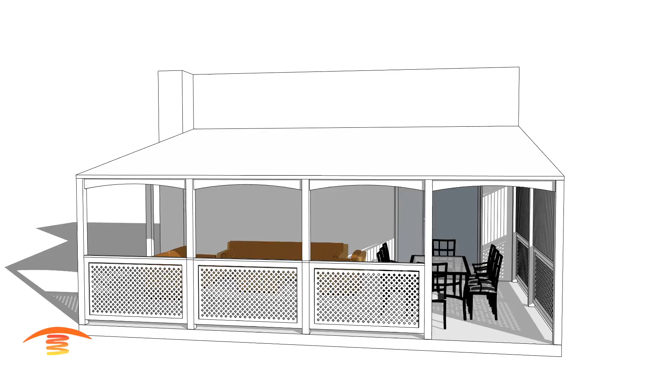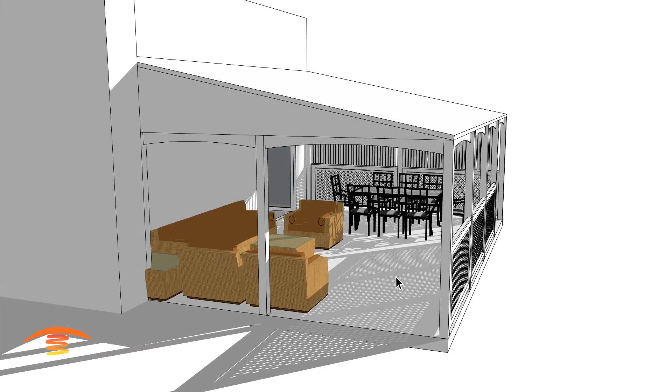Let's take a look at this residential application. So we have a couple of seating areas. We have dining space here, and then we have some reclining space back over here. You can see that the reclining space does not extend out to this area over here, so we're going to concentrate more on that space over here.

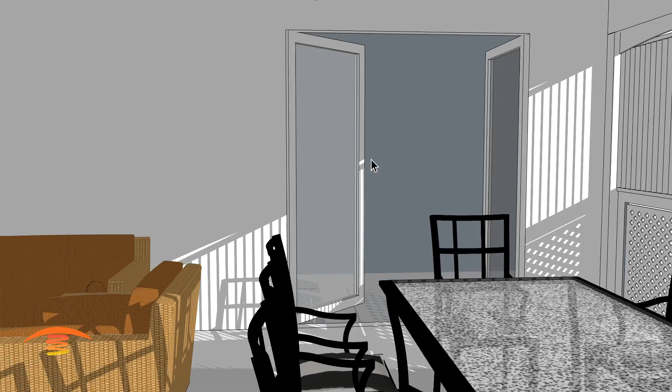Also, we have a solid wall. We have a nice wind wall back here. We've got some lattice that would reduce the amount of wind movement. We have a solid ceiling, and then also we have the doors back here. Now I have these doors so that they're opening inwards. I hope that's true. Turn off that shadow there for a minute.

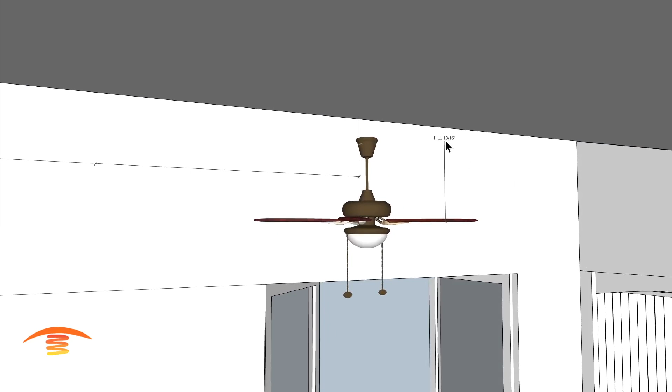Also, we have these fans. Now the fans I have at 36 inches away from the wall, and then I have them 7 feet from each other. And let's go ahead and look at the drop here. I know I have a drop from the ceiling point. Actually, I take that back. I have it measuring off this corner here, so I'm going to just remove that for a minute. But there is a certain amount of distance the customer said they were from the top. I can't get the measurement here right now.

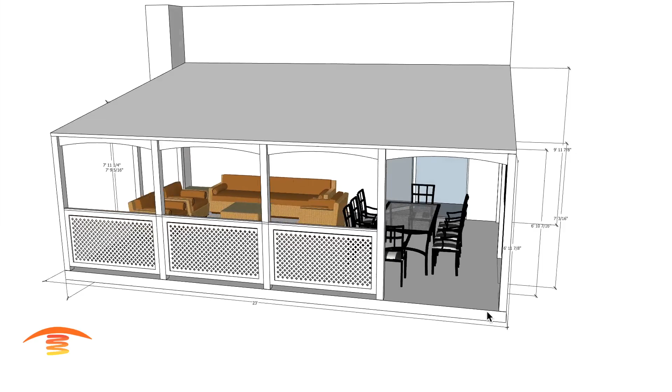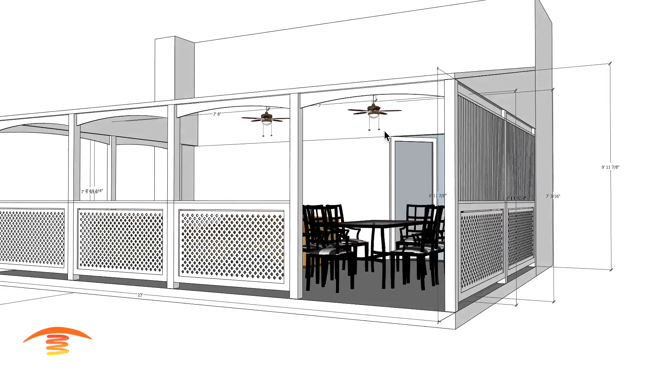In any case, let's look at the overall dimensions. 23 feet wide. I have a 15-foot depth to the back wall to the outside edge. Here I have about 10-foot height, and it comes down to, I believe, 6'11", so almost 7 feet height over here. I think that's about it. So the fans, because they're kind of close to the wall back here, do offer a little bit of a challenge.

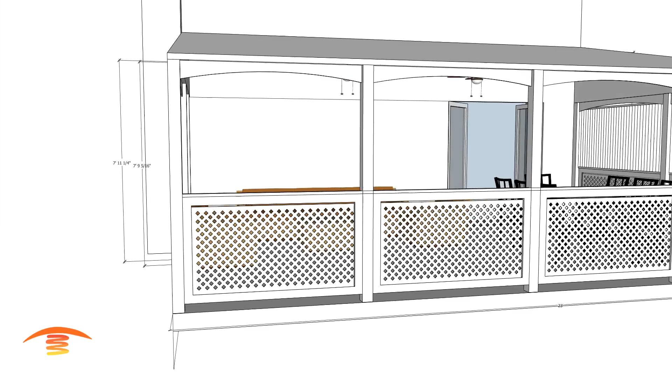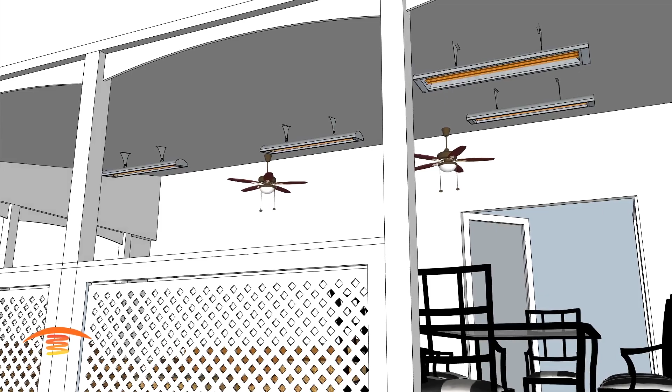So I have two different options for this application. Let me turn off these dimensions here real quick. And this would be option number 1. So in option number 1, I'm utilizing the CD 4024. So these are 4,000 watt 240 volts.

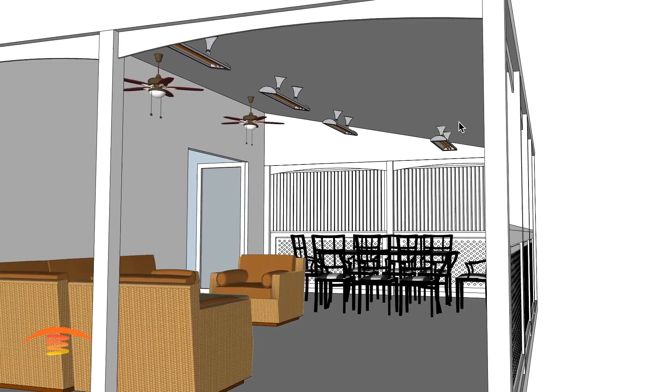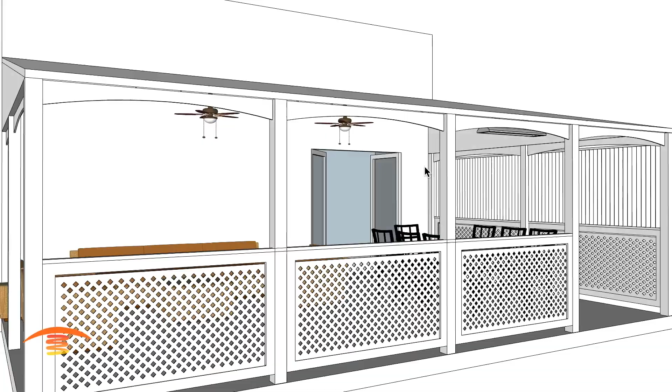One thing I did not mention yet is that this is a very cold climate area. This is in, I believe, Ohio. And so we obviously get some very, very cold weather. So this heating system is not going to produce the right amount of heat at all times of the year. Once you get down into even 40-degree weather, it can be questionable whether it's acceptable for you or not. But definitely when you get below 40-degree weather, 20s, I can't guarantee that would be a comfortable option in all cases. It's an individual thing.

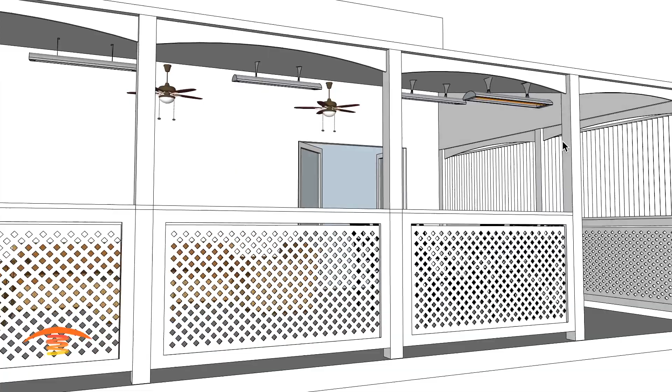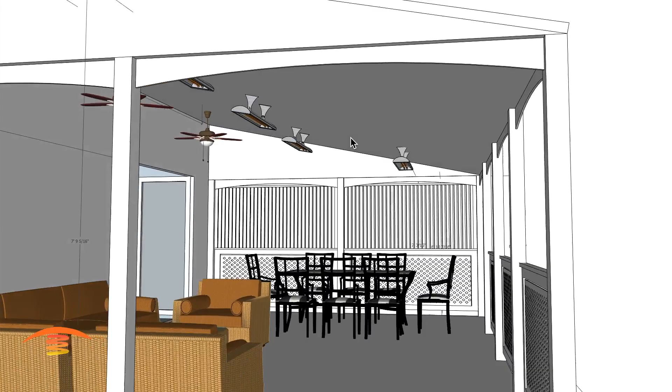These heaters are a high output unit that I would recommend. However, this is just designed to extend the season, not to eliminate the cold season. So let's keep that in mind. In any case, these are the 4,000 watt dual element units. I have them at roughly 7-foot centers from each other. Let's see if I have that listed here. I have them centered between these two fans, out 18 inches beyond this, and I have this at I think a 15-degree tilt.

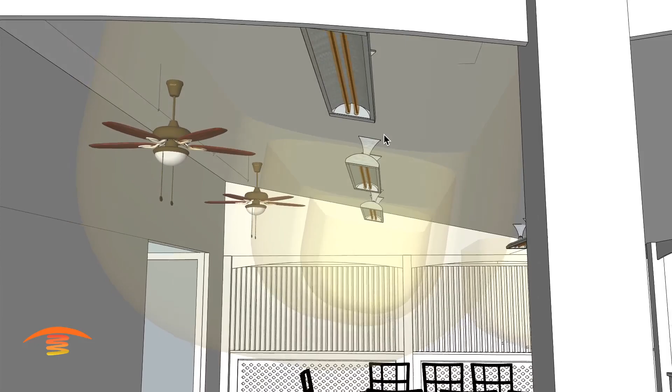Let's look at the clearance below the heaters. You can see that I'm meeting the clearance below the heaters by keeping it about 18 inches off. They are mounted on the ceiling up here, and again I have them at about a 10-15-degree tilt inwards. The reason for that is so that we can, let me turn that off for a second, get the ray to travel inwards towards the seating area over here. And you can see this particular height.

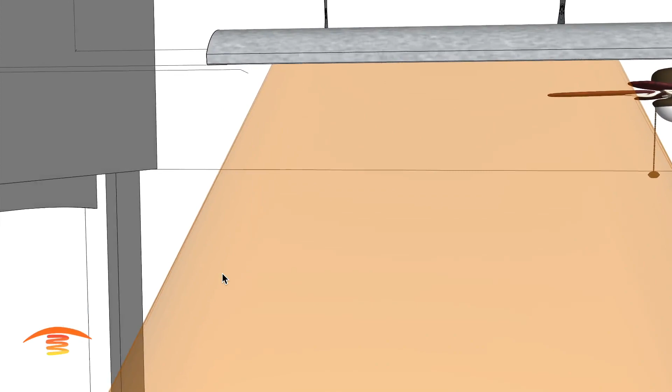Let's see here. We're at this elevation here, so 7 feet 9 inches roughly, and that's true with the 1, 2, 3 units in the back. And you can see that it gives a nice footprint throughout all the seating spaces here.

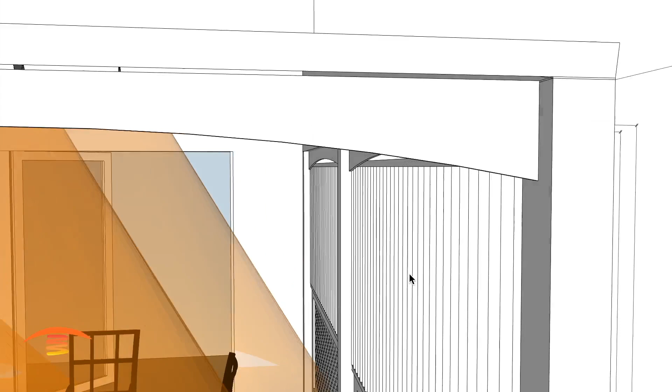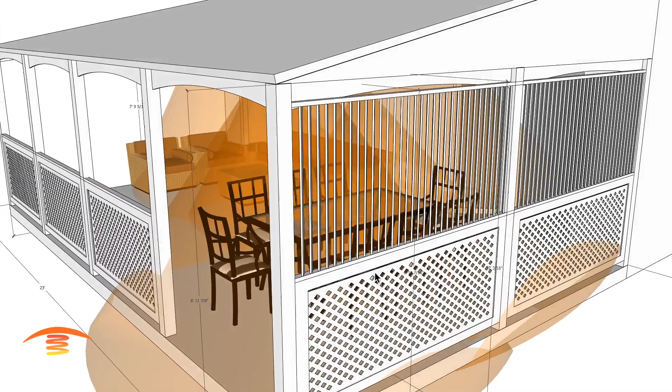Now this one here is a little bit lower because of the sloped ceiling. You can see here it's the same model, so this might be a preferred location because it's down almost a foot further, and if you're the cold person in this house, this might be the preferred space for you to sit in. And so you can see this one here is at the 6' 11 7/8".

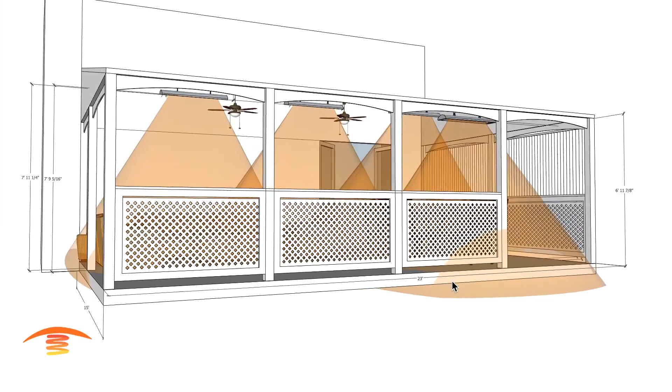I think in most areas the minimum height is 6 foot to the bottom of the unit, to the floor, that you want to ever go. So that's that. I'm not sure if there's anything else I can talk about here. Talked about the clearances, but you can see here again, it's got a nice footprint of heat throughout the whole space.

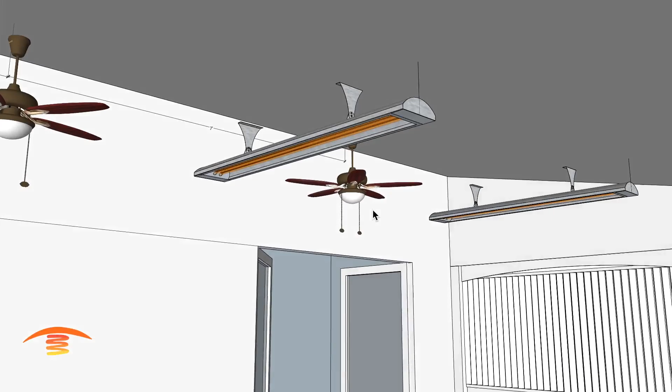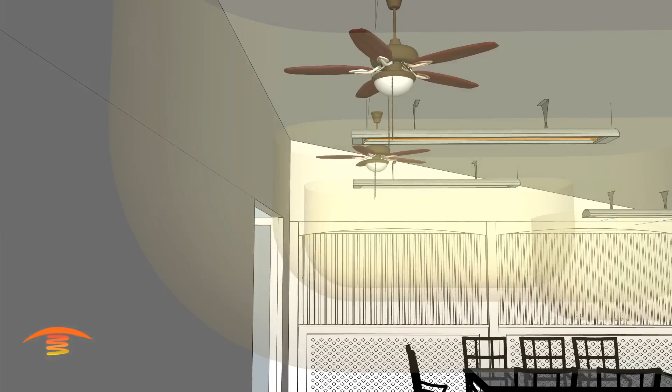All right, so another option would be to place units in this configuration. Now this gives us a little bit more of the heaters closer to this wall here, and you can see with the clearances below, I'm just approximately 24 inches off to the side here. So not only am I meeting the clearances to combustibles from the back side here, I'm pushing it out a little bit further as well.

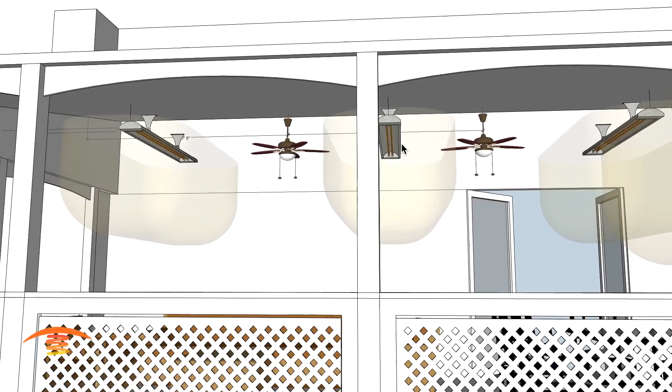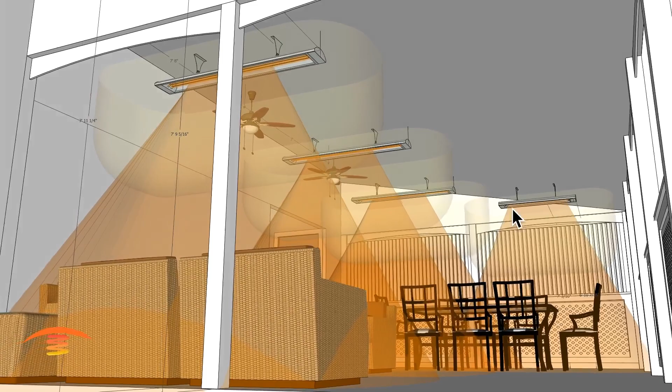And again, about a 7 foot center to center on the heaters, this being the center of the area based off of the fans. Let's go ahead and look at the footprint of heat. So footprint of heat is fairly good as well. You get a little bit better throw this direction, and it's a longer unit. So these are the 6,000 watt units. I didn't mention that. And this would be a 4,000 watt, or you could even go with a 5,000 watt unit over here.

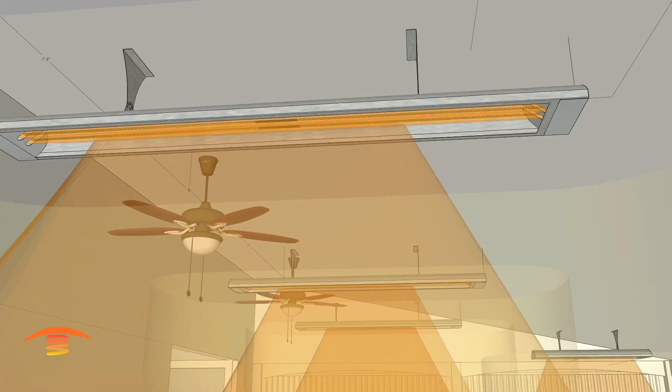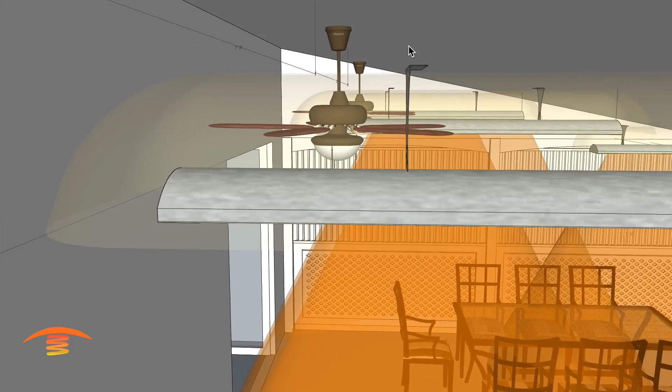You'll notice that the installation requires that the heater be level. So let me just turn this off for a second. So you would have to mount this bracket so that you are meeting the clearances to the combustibles above from this edge over. That's why it's not physically attached right here. And then you'd have to extend out this bracket here somehow, maybe by just adding a little piece between this joint right here. So you attach this to the ceiling, add a piece of stainless steel going down far enough to where you can drill a hole into the new bracket that you build and attach it to either one of these parts.

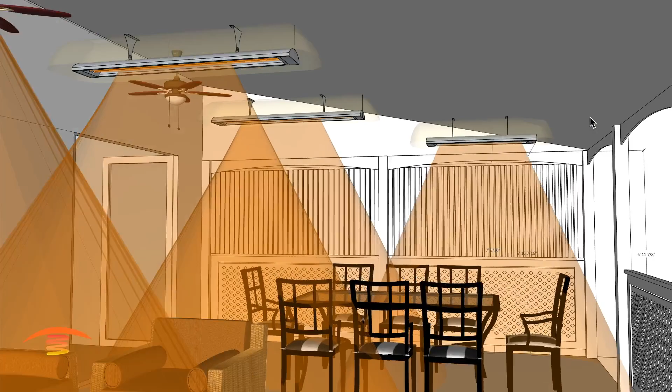Again, so the clearances are met, and that's true over here as well. So you need to go from this point here and then 6 inches down, make a bracket extension here, and then do the same on this side, a longer extension bracket so that the heater's level. All right, so that would be another option.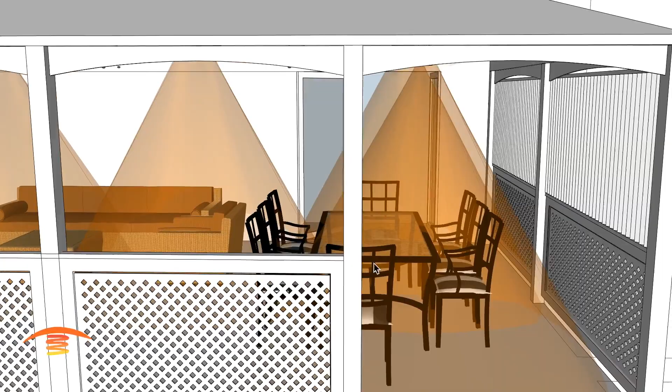You can see with this option here, I'm not getting the table as well as I did with the other option, and that's just because of the orientation of the heater. So you might choose to use the other option if you can.